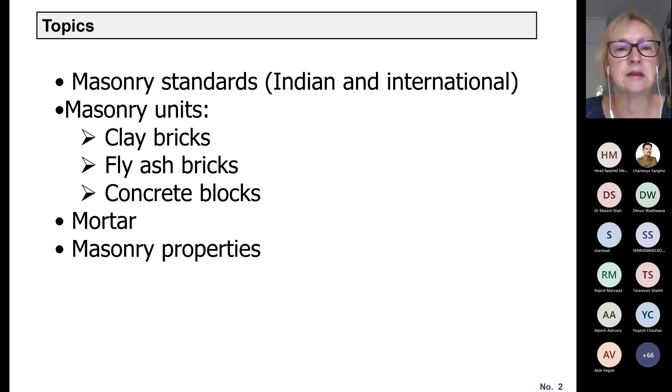Before that, we'll go over Indian standards, masonry standards. Indian masonry standards are several standards which were all issued by BIS, Bureau of Indian Standards. The main standard is IS 1905, which is Code of Practice for Structural Use of Unreinforced Masonry. Until this year, as we discussed yesterday, that was the only masonry standard for masonry design in India.

Then all the rest of the standards listed on this page are related to masonry materials. For example, there is a standard for burnt bricks, IS 1077, and then the standard for fly ash bricks, IS 12894, and so on. There is also a standard for mortar, IS 2250, Code of Practice for Preparation and Use of Masonry Mortar.

So for any details related to masonry materials, you can refer to standards which are available free of charge. In India, we are going to refer to some of them. You don't need, for this course, to read any of these standards, but it's good to know that they exist.

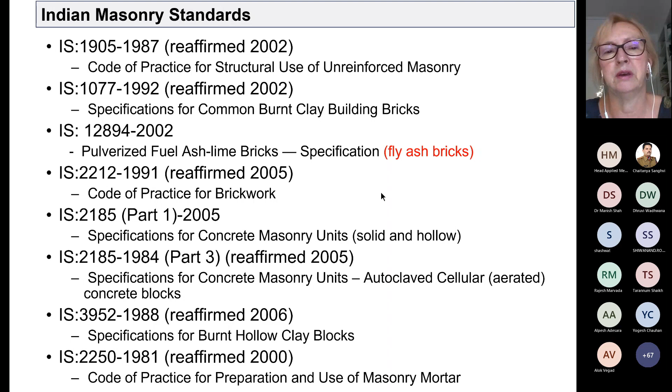So now we will go over masonry units. As we said, a masonry unit is a masonry element. I want you to know this term, unit. So masonry unit could be brick, clay brick, fly ash brick, block.

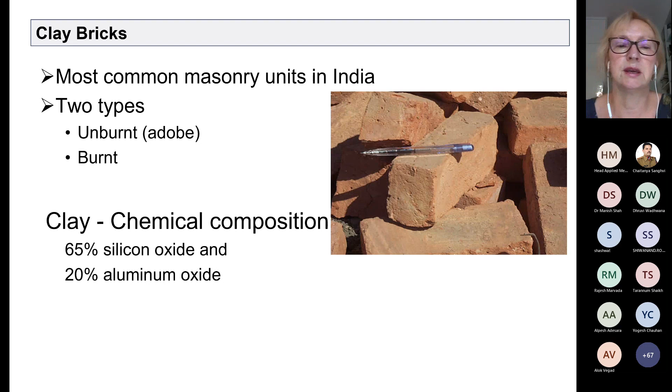Clay bricks are, as the name says, made of clay, and the chemical composition of clay is mostly 65% silicon oxide and 20% aluminum oxide. Typical dimensions in India of bricks are 9-inch length by 4.5-inch width and 3-inch thickness or height. There will be another slide showing this, but it is important in metric, in SI units, this is 230 millimeters by 115 by 76 millimeters, and it is important for you to know the brick dimensions.

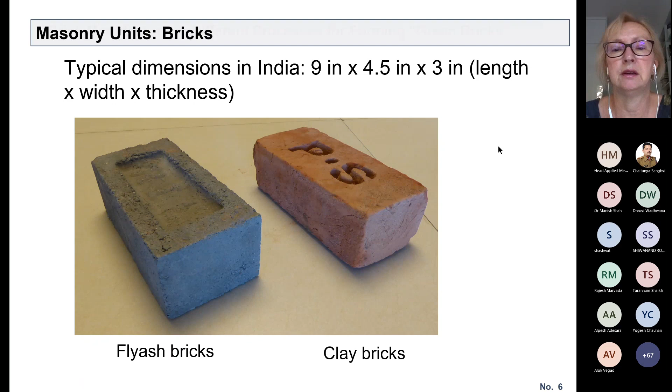So brick manufacturing, the quality or the strength of bricks, compressive strength of bricks, which is the most important property, strongly depends on the manufacturing process, the way they're manufactured. It depends certainly on the source material, which is clay, but it also depends on the quality of that material, and also on the process.

It is the clay which contains 20 to 30% of water by weight, so it's the maximum percentage of water. It is cast in molds, and the mold is turned upside down on a platform. And these bricks usually have a frog on one of the bedding faces.

These bricks are burnt in a continuous kiln known as a bull's trench kiln, the most common type in India. They are the most common bricks, and they are the weakest in terms of strength, the lowest strength.

Next are wire cut bricks, manufactured by the stiff mud process. The clay contains 12 to 15% water by weight, is mixed, forced through a die, and cut with wire. These bricks are significantly stronger, about twice as strong as table molded bricks.

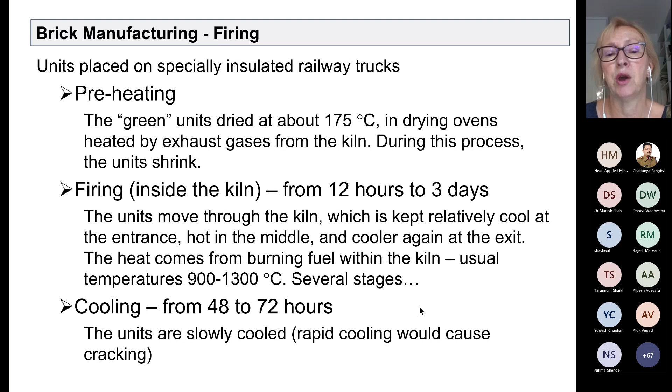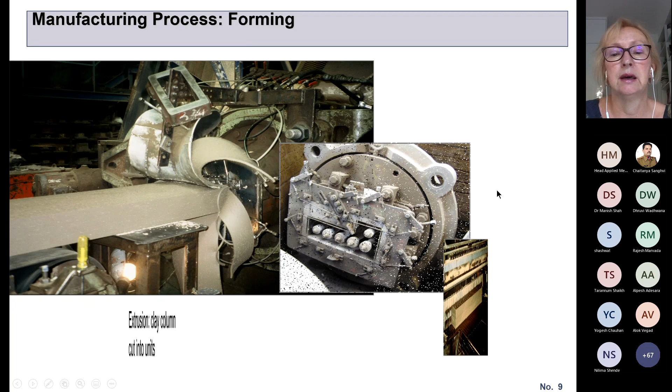These are photographs from a plant. You can see the forming process of the brick, and here is how it is cut with wire - this is a clay column which is cut into units. Finally the bricks are placed on trolleys and moved into the kiln, the furnace, where they're fired at about 1,000 degrees Celsius.

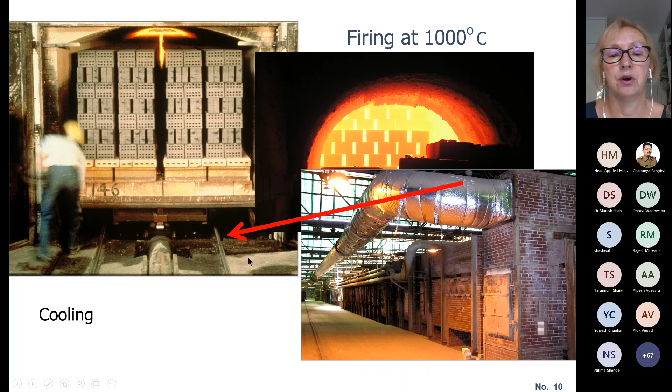Dimensions in India are mostly 229, practically 230 - you can remember 230. The other dimension you can remember is 115, which is half of that, and the third dimension is 75 or 76 millimeters. So this is 9 inches by 4.5 inches by 3 inches.

In Northeast India, dimensions of bricks are slightly larger: the length is 250 millimeters, and the other dimension is half of that, 125. So they are 2 centimeters longer in Northeast India than in, let's say, Gujarat or the rest of India.

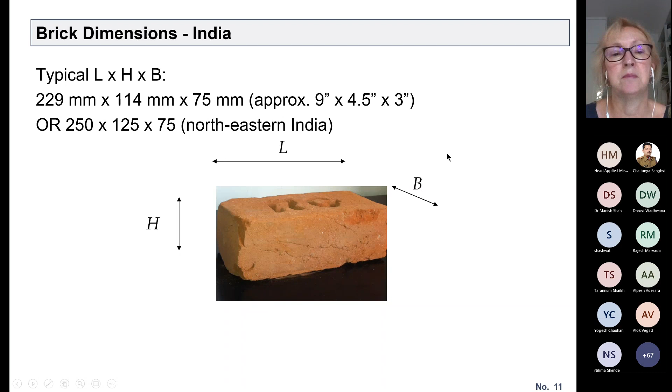As we say, compressive strength of bricks is the most important mechanical property of masonry because, while we don't directly specify it, we specify the grade of bricks, it significantly influences the strength of masonry, as we will discuss. Compressive strength of bricks strongly influences compressive strength of masonry.

Compressive strength of bricks - I will show you some photographs from testing. It is based on normal compression, determined by testing on a universal testing machine, and is equal to the compression stress acting on a horizontal face. In North America, brick strength ranges from 20 to 200 megapascals, whereas in India, the minimum strength prescribed by IS 1905 is only 3.5 megapascals.

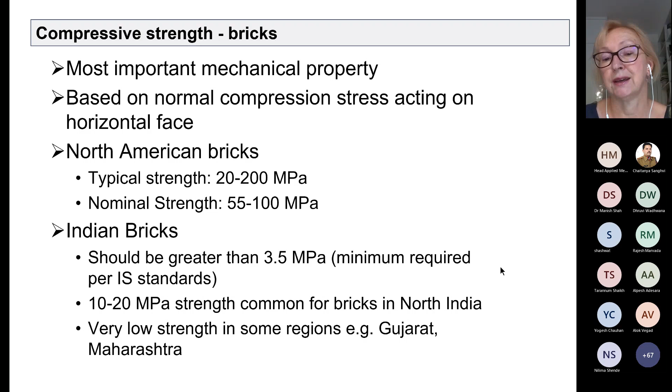So bricks that are 3.5 megapascals strong can be used for construction in India. 10 to 20 megapascal strength is common for bricks in North India, but in Gujarat and Maharashtra, you will often find bricks with only the minimum strength of 3.5 megapascals or even less. Very often, most often, this strength is not even checked - it is specified but not tested, except for larger projects.

This is the testing procedure. You can see this is actually a block, not a brick, but it has a capping, a sulfur capping, to make the top and bottom even. The same procedure applies for bricks, and then it is placed in a testing machine and crushed to determine the compressive strength.

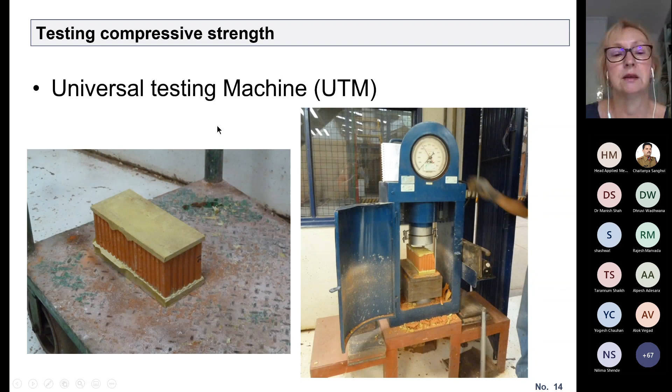The classes of bricks - how do we specify bricks? As I mentioned, there is a standard for bricks, IS 1077, clause 4.1. There is a table showing classes of common burnt clay bricks, with class designations ranging from 3.5 to 35. The class 3.5 is the lowest, related to average compressive strength not less than 3.5 newtons per millimeter square, which is megapascals, or 35 kilograms per centimeter square.

We are going to mostly use megapascals in this discussion. So if you have a brick class of 3.5, that means compressive strength of 3.5 megapascals. This is something you need to know, because in order to design masonry, you need to be able to specify class of bricks and also specify mortar type. In a construction project, you need to, as a designer, specify the class of bricks or blocks. Here I'll illustrate regional strengths of masonry bricks.

This is based on testing reports published in a book by Professor Jagadish, K.S., one of the top masonry experts in India. It's called Structural Masonry, listed at the end of this presentation. Unfortunately it's not available electronically, but it can be purchased in India, and it's a good book, a summary of his very long experience. Professor Jagadish was a professor at IISc Bangalore, and often visited Ahmedabad, collaborating with Nirma University on shake table testing. He is a very well-known and top expert in India currently.

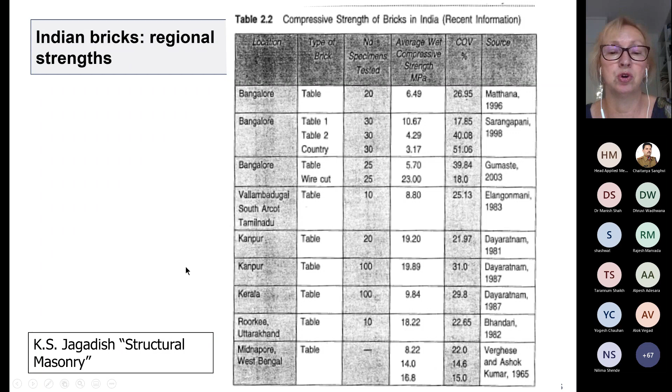And in West Bengal, it changes. But if you go to Maharashtra and also Gujarat, strength of bricks is maybe very low, close to the minimum code value. There are more values in the book by Professor Jagadish, and more reported values in various papers and publications.

In conclusion, from the clay bricks, I would like you to know what is the class of bricks and what is the minimum allowable grade in India. For fly ash bricks, they're specified by the standard listed at the beginning, IS 12894. They have higher crushing strength or compressive strength compared to clay bricks - normally 10 to 15 megapascal strength can be easily achieved - and they have relatively low water absorption. They have reduced efflorescence, although efflorescence is still possible with these fly ash bricks.

They have a smooth and uniform size, require less quantity of mortar, and no plaster - though I think plaster is always beneficial due to rainy season. The density of fly ash bricks is less than clay bricks: about 1600 kilograms per meter cube, while for clay bricks it's about 1900. Lower density means lower weight of load-bearing walls, and saves some transportation costs.

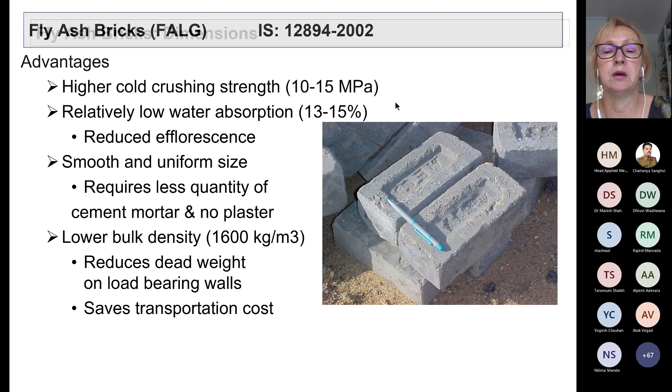So these are some photographs of fly ash bricks along with a pen to show the size, and you can see that they have a frog as well. The frog is this indented portion in the brick, usually produced for better bond properties as discussed yesterday. Here are some dimensions of fly ash bricks.

Fly ash bricks are slightly smaller in dimensions than clay bricks, around 19 or 20 centimeters long, with the other two dimensions being 90 and 90 millimeters. But they are used in the same manner, with the same type of bond or pattern.

Methods of manufacturing for fly ash bricks: the primary ingredient is fly ash, the byproduct of thermal plants. For example, in Ahmedabad there are thermal plants close to the city, in the Gandhinagar area, and this fly ash can be recycled as an ingredient for masonry, making it an environmentally friendly or eco type of masonry unit.

The other ingredients are sand and lime, with small quantities of chemical accelerators added. In the mixing stage, the ingredients are dry mixed with about 8 to 10% water and a small percentage of chemical accelerator, then subjected to thorough mixing.

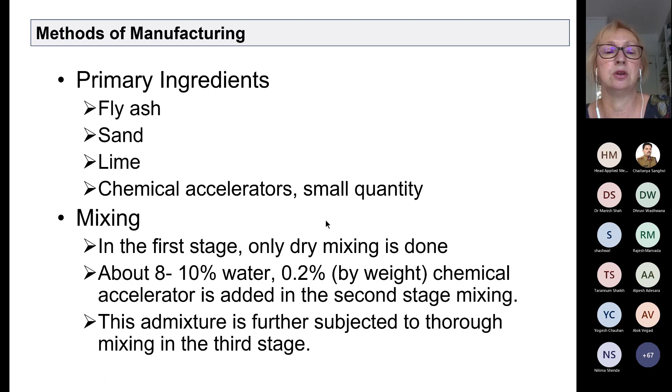In the molding stage, the placed raw material is subjected to pressure. They're manufactured under pressure of about 25 megapascals in a suitable hydraulic press. These are some examples of presses available in India.

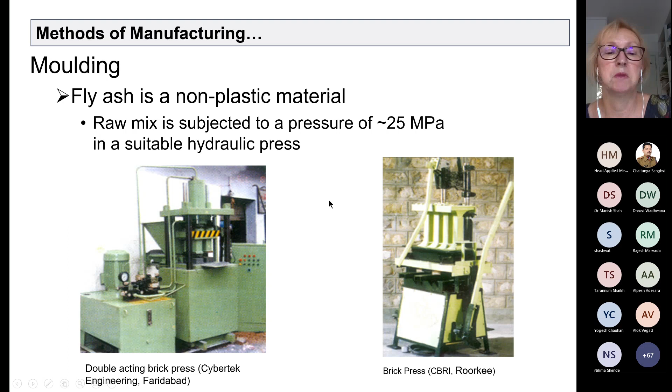Then there is a drying stage where the bricks are exposed to natural drying for about 48 to 60 hours, depending on weather conditions. Finally, there is steam curing, where the bricks are cured in autoclaves at the desired pressure and temperature, then stacked in the open to gain further strength for a small amount of time, like 2 days.

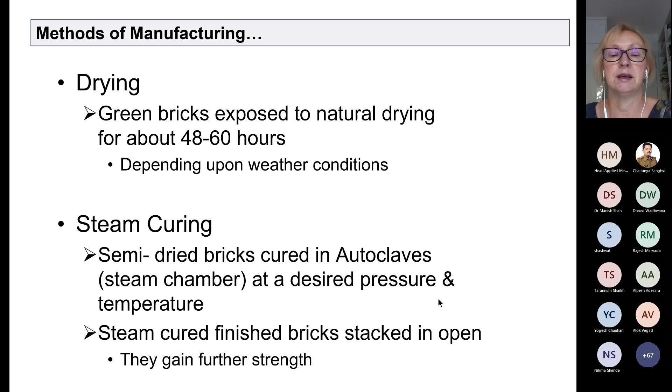When IIT Gandhinagar campus was constructed, there was first an attempt to use clay bricks for the load-bearing masonry, since practically all residential portions of the campus use load-bearing confined masonry. There was a need for a minimum class 7.5 grade of clay bricks. However, it was not possible to get bricks of that class in sufficient amounts, and there was limited time for construction.

Therefore, a decision was made to use fly ash bricks and set up a plant at the campus. These are photographs from the plant - on the left you can see the press, and on the right the bricks coming out of the press. The process was set up, and the plant was able to manufacture more than 1 lakh bricks per day.

Additional fly ash bricks were purchased from other plants as well, since even the campus plant's output was not sufficient for the needs of the campus construction.

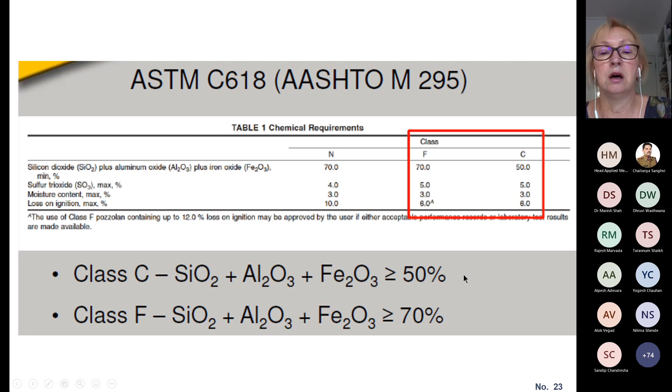These are some chemical requirements - you don't need to memorize them. Here is a summary of fly ash bricks for India, including the class. The density is 1500 to 1600 kilograms per meter cube, whereas for clay bricks it's 1500 to 1900, though I usually take 1920 as the common value in India.

In this table you can see the class designation, which works the same way as for clay bricks - the class designation equals the compressive strength in megapascals. So class 15 means the compressive strength is 15 megapascals, or 15 newtons per millimeter square. That's good news - whether it's fly ash brick or clay brick, you specify the class in the same way, though we call it class, not grade. The full title is Pulverized Fuel Ash Lime Bricks, or FALG.

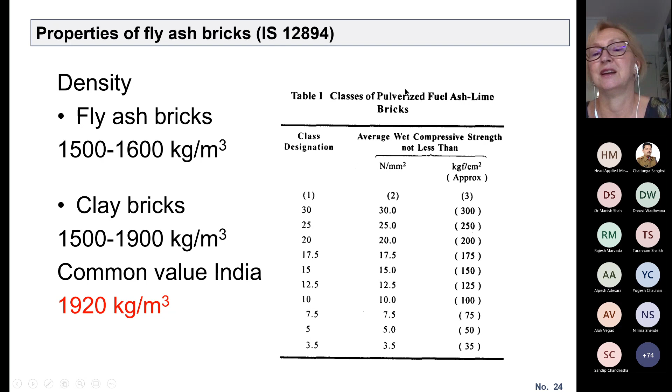So that is the common name, concrete blocks. I'll just mention them, as you know they are available in India, and unfortunately I believe the quality is mostly not good. They could definitely be used for confined masonry construction if the strength is good enough.

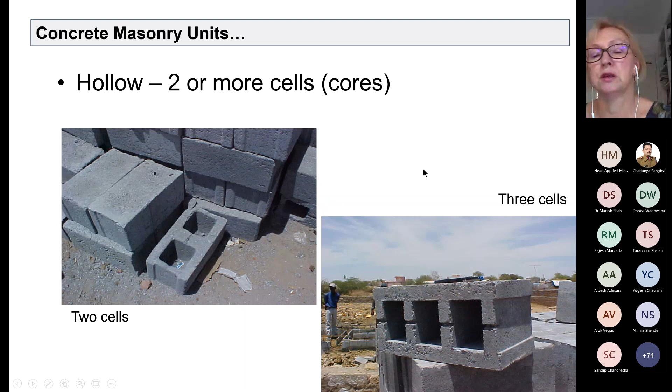In Haiti, I showed you some photographs yesterday, saying that it was very bad block quality. They all had 3 cells, so they were not reinforced, and they were with 3 cells in most cases.

Dimensions of concrete blocks are also standardized, like bricks are standardized, they're more or less fixed. Dimension B, as you can see at the bottom, is the width, H is the height or thickness, and L is the length. We have 2 types of dimensions: nominal and specified. Nominal dimensions for B and H are 200 millimeters or 20 centimeters, and the length is 400 millimeters or 40 centimeters.

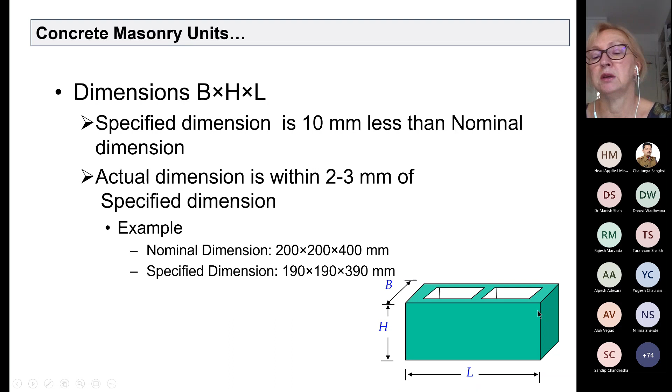Specified dimension is 10 millimeters less than the nominal dimension, that's simply how it is. Normally we always refer to blocks by nominal dimensions, so the standard length is 40 centimeters, height is 20, and width is also 20 centimeters.

Here is also from a Canadian book. These are standard, and we call it by the thickness. This thickness, 190 or 200 millimeters, is variable. In the blocks, the other 2 dimensions, length and height, are always fixed. We only change, or it is possible to change, only the thickness of the blocks.

So there's a variety, this photograph is from Canada, of all types of blocks that are available. You can see a variety of full-size blocks with 2 holes, then a half block, because in masonry construction we need also half blocks, and so on.

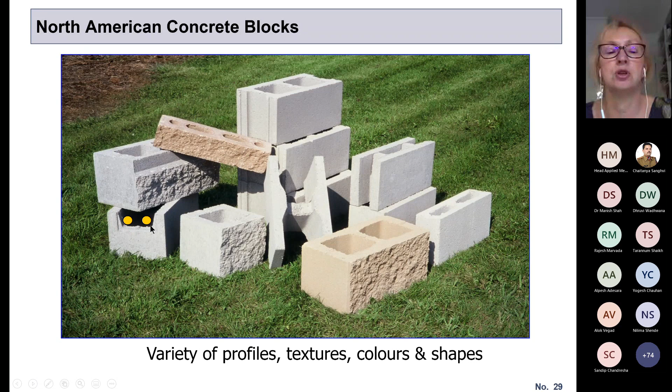And this is, when I talked about reinforced masonry blocks with the indentation or cuts, it's called bond beam blocks. These yellow circles shown at the bottom left corner represent reinforcing bars, so that reinforcing bars can fit. That is a special block provided at certain locations where we want horizontal reinforcement, so not every block is like this.

As I said, the width or thickness nominal starts from 100 millimeters or 10 centimeters. These are mostly for partition walls, and 125 also for partition walls. 150 is the minimum that could be used for load-bearing construction, but usually the typical block is 200 millimeters thick. There are also 2 higher thicknesses, 250 and 300 millimeters. So these are all possible block thicknesses available in Canada. As I said, standard is 200, and most buildings are built using 200 millimeter thick blocks.

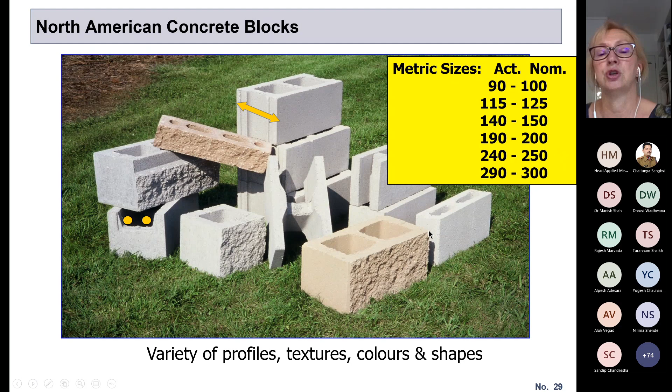What is interesting is that in the manufacturing process, it's possible to create a nice texture outside, so there's no need for extra finishing. You can see on these 2 or 3 blocks this rough texture that is done purposely. These are for exterior walls, and they don't need any finishing on top of it. So there is a pretty developed process.

In block manufacturing plants, this is the so-called dry cast process concrete. You can see here the photograph, these are the blocks before being processed. They are so-called green blocks after cutting and forming, and they stand without falling apart even though they have not been hardened yet.

That means the mix is very dry and the percentage of water is very low. There is no defined percentage of water for block manufacturing according to the standards - the only standard is the required strength. The ingredients for blocks are cement, aggregate, and water, manufactured by vibration, same as concrete. There is very high output - these plants can make at least 10,000 blocks a day or more.

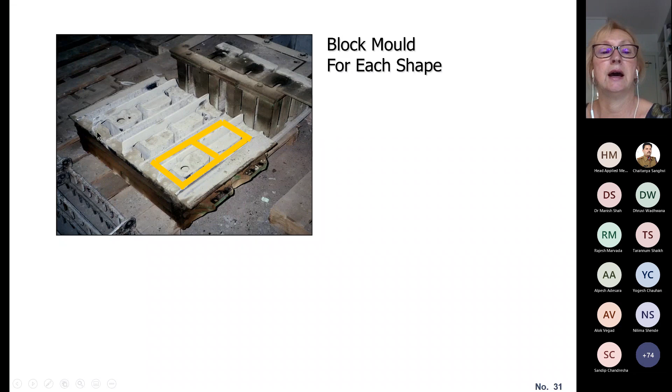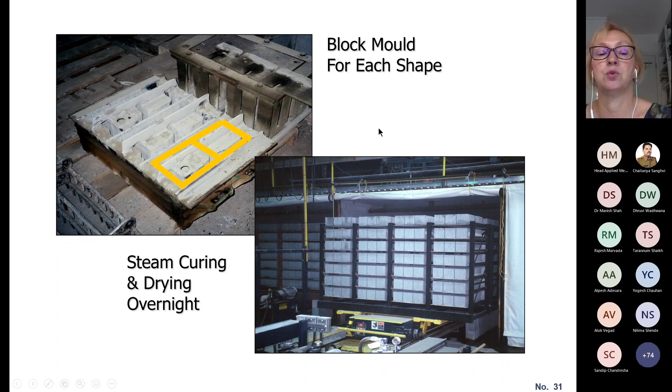For regular concrete construction we need 28 days curing to harden, but here we are talking about 1 day curing before the block is good for construction. There are different molds for each shape - if you have different block thicknesses like 200 millimeters and 300 millimeters, you'd have different molds. After cutting, the blocks are placed in special chambers where they're cured in an accelerated manner by steam curing, dried overnight. They're not burned, just steam cured, which leads to very fast hardening, and they achieve full compressive strength within 2 days maximum.

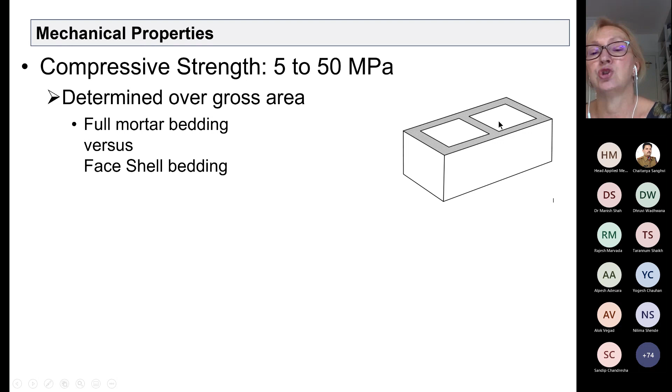Mechanical properties of blocks: compressive strength is 5 to 50 megapascals. It could be determined over gross or net area, so that needs to be specified by the standard. You need to be careful how it is determined if you're involved in testing - for design purposes it doesn't matter, you can use the strength value from the testing lab. But for testing, the standard specifies this because in some countries the strength is determined based on gross area, meaning we take outer dimensions - width times length - whereas net area would be the gray shaded area, meaning we don't take into account the holes.

In India, the standard where you can look for the specification of blocks is IS 2185 part 1, which gives physical requirements for blocks. We have different types: for load-bearing units, it is grade A block and grade B block. You can see the A or B, and in the brackets the number, which is the compressive strength. Typical compressive strengths for A blocks are 3.5, 4.5, up to 7 megapascals. For B, it is smaller - 2, 3, or 5.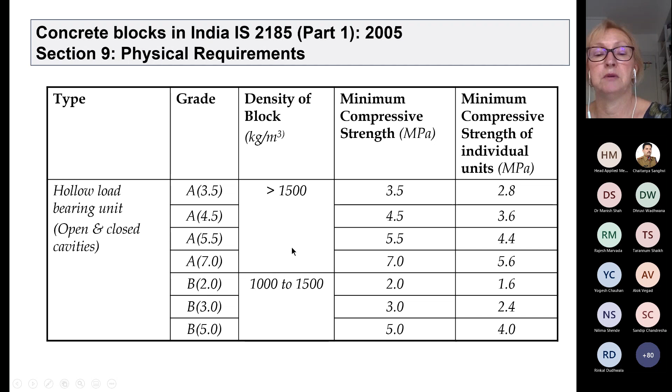You can specify different strengths if you order from the plant, but these are listed in the standards as typical strength, with maximum strength being 7 megapascals. The density of a block is also less than concrete - just greater than 1500 kilograms per meter cube, versus concrete density close to 2500 kilograms per meter cube. For B type it is even less. Then we have C type, a non-load bearing unit with lower strength of 1.5 megapascals. And D is a solid load-bearing unit - A, B, and C are hollow, D is solid, with strength of 5 or 4 megapascals.

Indian compressive strength values are significantly lower than other countries, where the usual minimum value is 10 megapascals. But in India, lower values are acceptable right now, I guess because blocks were used for low-rise buildings or non-load-bearing structures, where strength is not as important. But for load-bearing masonry, as we will discuss, the strength is really important and has to be higher. So these were the masonry units we covered: bricks, blocks, clay bricks, fly ash bricks, and blocks.

Now we are moving on to the mortar. Mortar is like a glue, it bonds the masonry units together into an integral structural assembly, which we call masonry. So we call it a masonry wall if we have bricks or blocks, and mortar at the minimum.

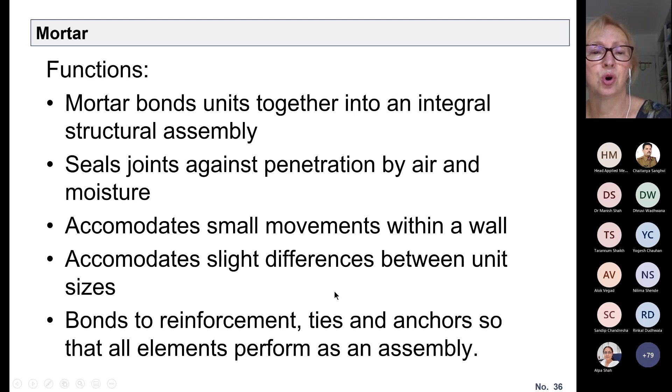Mortar, as I said, is very important to seal the masonry and to prevent water penetration. The mortar joints can be tooled differently if we want a special appearance for the exterior. I'm not going to go into that.

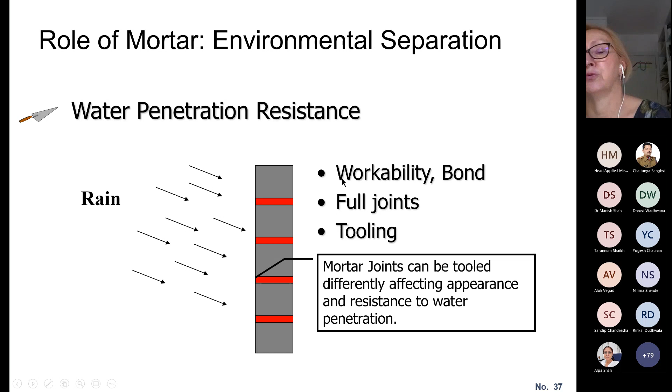For mortar, it is very important to be workable. Masons know what workable mortar means, that it can be easily applied. That's why there is no exact percentage of water, or water-cement ratio, like in concrete. The mason, by experience, uses the amount of water needed for this workability.

Mortar in masonry walls is subjected to tension, compression, and shear stresses, which is actually testing the bond between masonry and mortar. So the mortar needs to be subjected to horizontal stresses in order to test the bond.

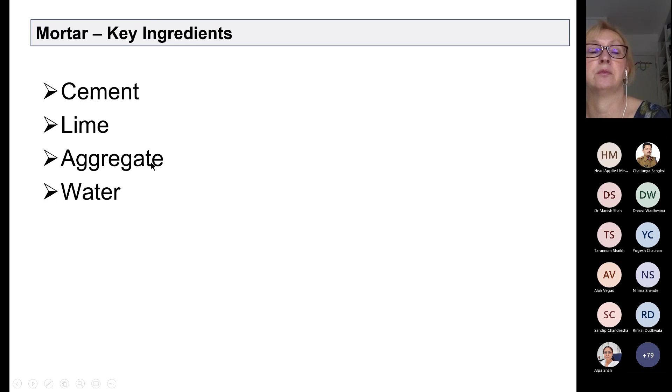Key ingredients of mortar are cement, lime, aggregate, and water. Aggregate is more or less sand, but lime is optional, though very good. So nowadays the mandatory ingredients are cement, aggregate meaning sand, and water. Lime is an optional ingredient.

I will talk about two types of mortar classifications. One is by the ASTM standard, which is used internationally, and I'd like you to be aware of this classification, which is actually much simpler than the classification in India. Then we will go over the classification of mortars in India according to IS 1905.

According to the ASTM C270 standard, used in the US and Canada for sure, maybe in some other countries, the mortar types come from the words mason work. You can see the capital letters M, S, N, O, and K. Type M mortar is the strongest, type K is the weakest. So the types of mortars are M, S, N, O, and K.

There are several types, but mostly for construction of structural masonry, which would be load-bearing, or used for reinforced or confined masonry, type S mortar is used, which is convenient. S stands for structural, whereas type N mortar would be used for non-structural work. For example, if you are building a masonry infill in a concrete frame, you would use type N mortar, not type S, in Canada or the US.

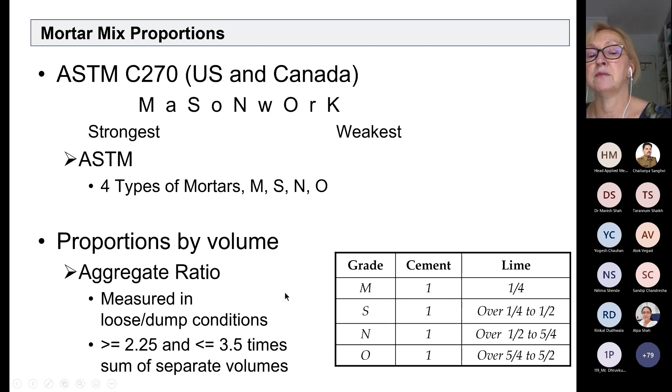So we order type S mortar, it already comes in a bag, just like cement is sold in India. This is a table listing the specification for these 4 types of mortar. I'll focus only on type S. As I said, 1 cement, 1/4 to 1/2 lime, and then aggregate sand practically, let's put 3. So 1, let's say 1.5 over 3 would be the ratio of this mortar.

Air content we did not talk about, we don't have time to discuss this property, but it's also important. Average compressive strength, maybe you remember, is on the order of 12 megapascals, which is higher than the strength of brick in India. So this would be a high strength mortar for a brick, which is, let's say, 3.5 megapascals.

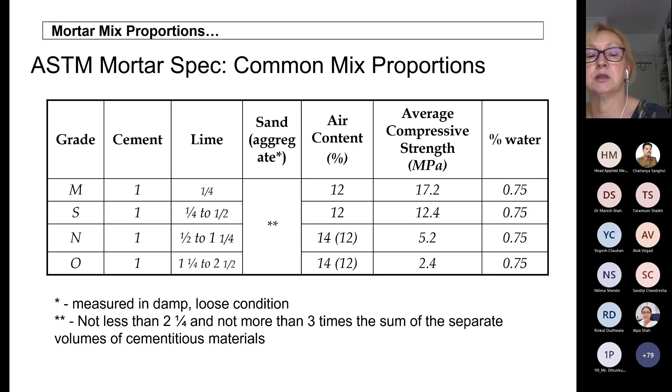The most common mortar in India is M1 mortar, which is 1 cement to 6 sand. That mortar has a strength of only 3 megapascals. That's okay if the strength of bricks is also low, but if you require higher strength bricks, then type H mortar would need to be used. So in summary, types H, M, and L are all specified by IS 1905, and for confined masonry the same labels remain. We are taking all material properties from IS 1905, so you need access to that standard to understand or have a list of these mortar types.

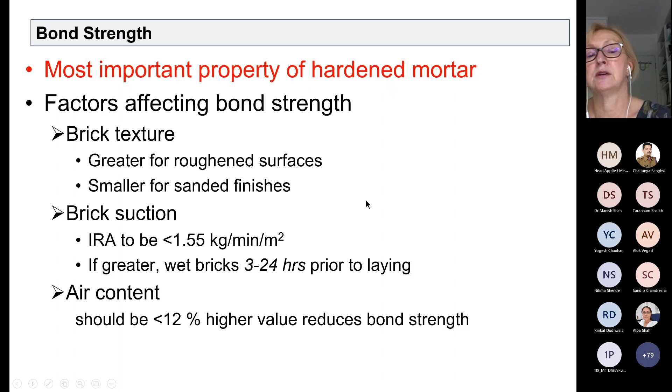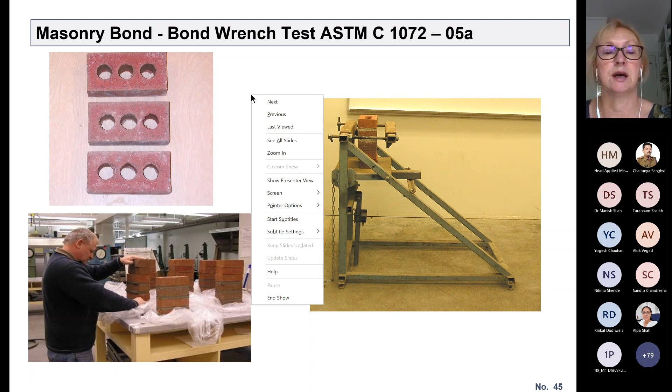It is according to this standard, but you need to have this testing frame, which needs to be manufactured in the lab or site. Sorry, I removed those other slides showing results because of limited time.

Bond is an important property, but we never specify bond. What we specify, the only property of mortar that is specified for construction and design, is compressive strength. In fact, we specify the type of mortar, which comes with the compressive strength. So if you say H1 mortar, we expect that it has a strength of at least 10 megapascals, as discussed.

The test is done based on mortar specimens which are 50 millimeter cubes, similar to testing of concrete cubes, but these cubes are smaller, and they're tested in a universal testing machine after 28 days. Mortar cubes are cured in the same way as concrete cubes, and mortar strength in the wall may be higher than those tests because of the interaction of bricks and mortar. What happens is when mortar is fresh and the bricks have higher absorption, they absorb water from the mortar, which actually causes the mortar strength to increase, but bond may decrease in reality.

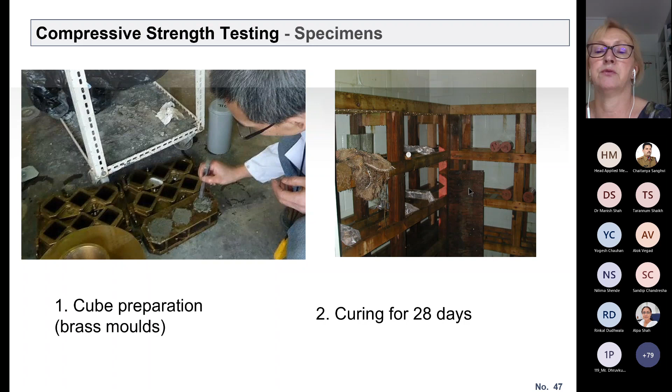This is the placing, according again to ASTM standards - there are specific molds for mortar cubes, and after they're prepared in a specific way by tamping, they're cured for 28 days in a curing room, and tested in a testing machine, at the end exactly the same way as concrete cubes - there is no difference.

Now what is really important is this magic 1:6 cement sand mortar, which is used in India, or at least when I was a student at University of Roorkee, that was the mortar I used for construction of my model. Until now, I think this was the most common mortar type.

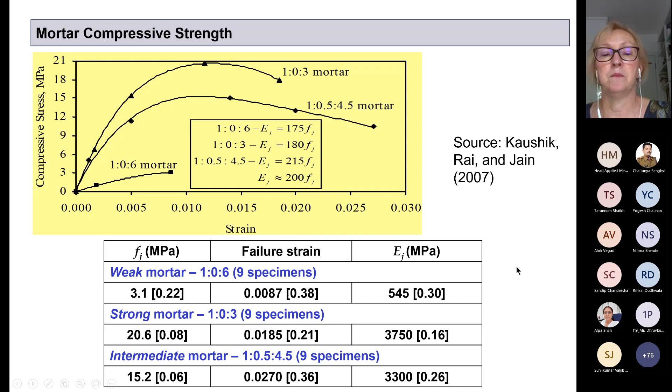So that is important. That is all I wanted to say about mortar. As I said, there are some other properties, maybe more details about bond, about air content and all that, but we are not going to talk about that. We are focusing only on the properties relevant for our design in the course, but there could be more. Normally my lectures on masonry materials are longer than this.

So for mortar, I would like you to know what are the types of mortar in India and what are the types according to ASTM, and which types are used for load-bearing masonry. And today, at the end of this lecture, you will see what is required by the Indian standard for confined masonry. Not all mortars are allowed for that, and not all brick or masonry unit properties are allowed.

Now, the final topic in terms of description is mechanical properties of masonry, and our main focus is compressive strength, which is called F'm. This F'm is equivalent to Fck for concrete. This is the property that will be used for design. We always need to know somehow, or assume, what is the F'm for the masonry in order to design a confined masonry structure, a wall, for example, which we will do. So this is the most important mechanical property of masonry, since it is most intimately related to resistance under load, serviceability, and durability.

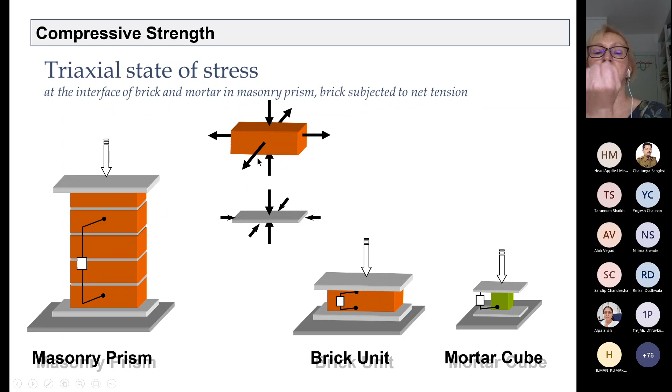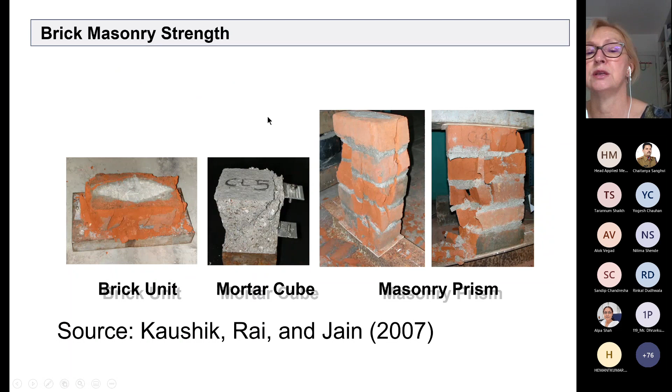This value of F prime M can be evaluated by compression tests on masonry prisms, and design of masonry elements can be based on the specified compressive strength of masonry, whose role is analogous to that of specified characteristic strength of concrete. So we need to get this strength either by testing or by specifying the strength, the class of brick and mortar type according to IS 1905 standard. I will show you how to do that at the end of this lecture.

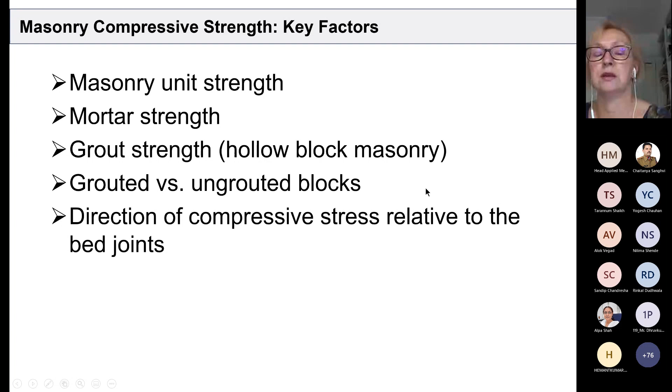What are the key factors that influence masonry compressive strength? Masonry unit strength is number one, and it influences to the maximum extent. Mortar strength is second. In case of block masonry, grout strength, grouted versus ungrouted, and direction of compressive stress relative to the bed joints are also critical. So these three factors are critical for brick masonry: unit strength, mortar strength, and direction of compressive stress relative to the bed joints. I will show you what that is later, but these first two we will discuss now.

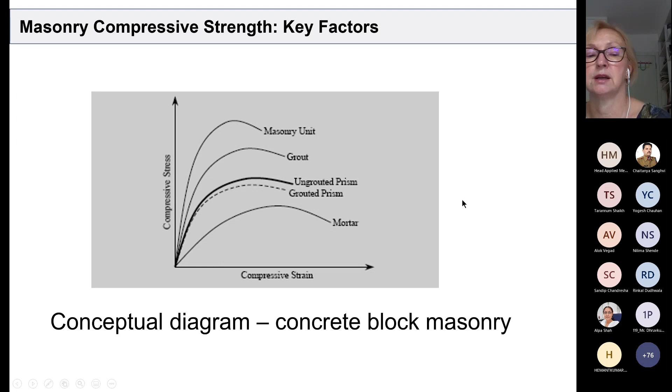If compressive strength of masonry units is higher, we have stronger bricks. We are in northern India and we have 20 MPa bricks. F prime M is going to be higher than F prime M in Gujarat, where we have lower strength bricks, and we use the same type of mortar.

As far as mortar is concerned, lower strength mortar will result in low prism strength, but there is, I would say, a myth that mortar strength is important and the percentage of cement is more important than bricks. That is not true. Actually, it's more important to have higher strength bricks.

Thickness of mortar with respect to thickness of unit is important in India. You could see that in some cases mortar joints are thicker. Normally it should be 10 to 12 millimeters, but in practice you can see 20 millimeters or more. There is no benefit of it. It is a waste of mortar and it can result in lower masonry strength. There are some tests to that effect, but I'm not showing the results.

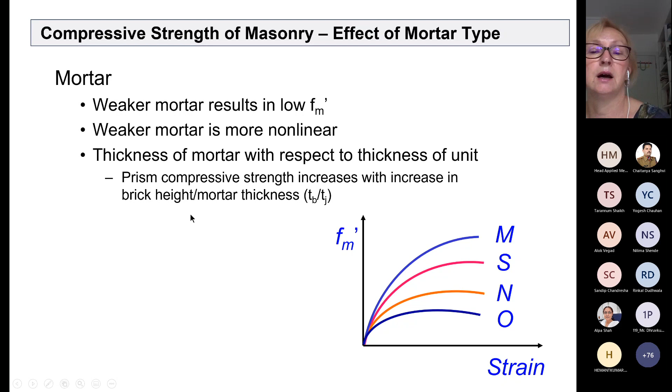Mortar type, as I said, these are now shown with the ASTM types. The higher strength of mortar influences the strength of masonry, as I said. That is there. But the question is how to determine compressive strength.

We are coming now to the way that we are going to determine this for the course. One way, and that is how it is specified by Indian standards as well, is to do a prism test where at least 2 to 5 units are stacked together and tested. The other is a knowledge of the unit and mortar strengths or assumption, and based on that we determine F prime M. The third is an in-field test: if you already have a constructed wall, you would need to take samples from the wall. But for new construction, we have options 1 or 2.

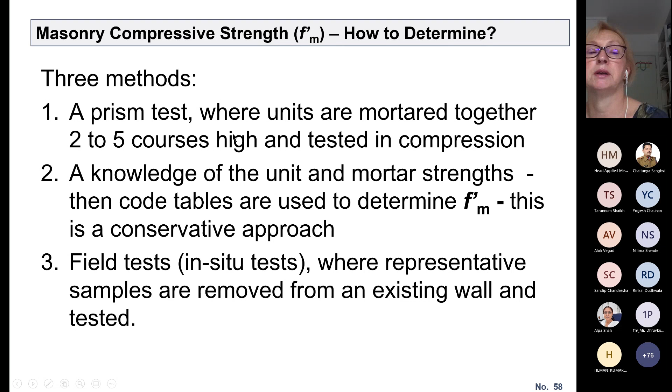Either do a prism test at the site for larger projects—for example, at IIT Gandhinagar project, these prism tests were done—or have knowledge of this. The strength of brick masonry is determined based on the net horizontal area of the bricks, and there are some correction factors depending on the height to thickness ratio of the prism, which could reduce or increase the strength depending on the ratio. That is all specified in IS 1905.

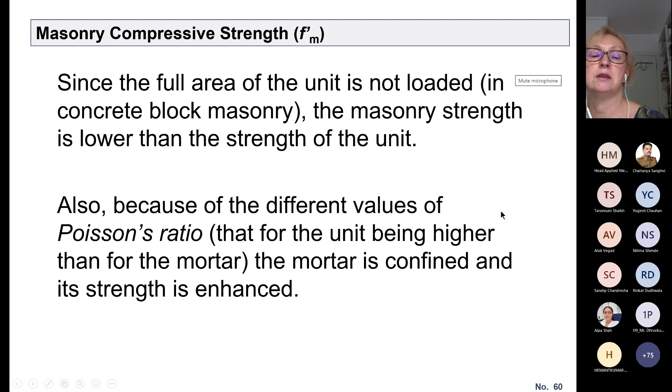Since the full area of the unit is not loaded—that is only for concrete—the strength of masonry is lower than the strength of unit because there are different values of Poisson's ratio: Poisson's ratio for the unit is higher than for the mortar. So the mortar is confined and its strength is enhanced, but those differences in Poisson's ratio make a difference in the strength of masonry versus strength of masonry unit.

Here are some results from the work by Kaushik, Rai, and Jain. You can see they tested four brick strengths: one type was 16 megapascals, B bricks and M bricks were maybe 18, S bricks about 20, and O-type bricks were more than close to 30 MPa. These O-type bricks are very high for India. You can see here the influence of prism strength depending on the mortar type.

So you can see this 1/6 type mortar, and you can see how it changed depending on the brick strength. If brick strength changed from 15 to 30, there was a change in the prism strength, but it is not twice. If you have a higher strength mortar, the change in the strength of prism is very small. For the same mortar type, it was a smaller difference in the prism strength. So for this 1/3 mortar, and 1/0.5 and 4.5 type of mortar, it's very flat, not a very steep curve, depending on the brick strength.

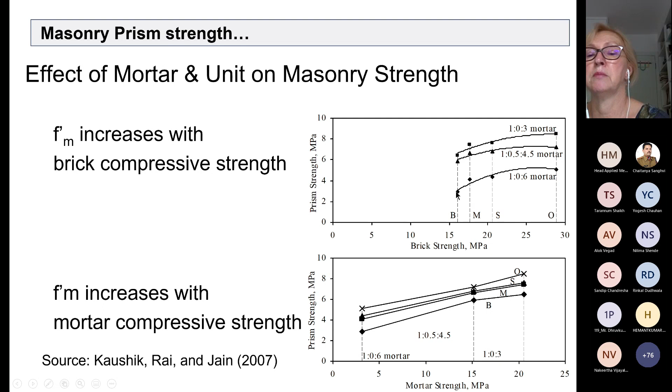This is another way of showing it. This is the variation in mortar strength on the horizontal axis at the bottom, depending on the brick type. You can see that for 1/6 mortar, which is the lowest, you see the largest variation in the prism strength. That is actually the same information from the upper diagram, so the conclusion is the same. In any case, F'M increases with brick compressive strength, and F'M increases with mortar compressive strength. So both are important, but I would say bricks are more important, particularly for lower strength mortar, as you can see on the upper diagram. For 1/6 mortar, it changes maximum depending on the brick strength, much larger extent than for the other values.

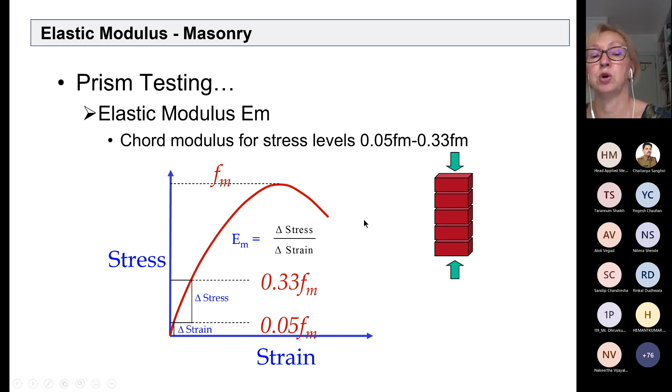In terms of elastic properties, the next property besides compressive strength is the elastic modulus of masonry, and it has to be obtained by prism testing, or there is a formula. Elastic modulus based on prism testing is obtained by the stress strain diagram - it is a slope, as you know from Hooke's law, in the range of 5% to 33% of F prime M. This is a stress strain diagram of masonry. F prime M is the maximum strength. I would also like you to know the shape of the diagram - it is parabolic, and the maximum value is F prime M. The slope of the stress strain diagram in the low stress range, from 5 to 33 percent of F prime M, gives us EM, the modulus of elasticity of masonry. That is an important parameter for design, because in any numerical model you need to have the modulus of elasticity.

So the tests done by the same group, Rai and Kaushik, Rai and Jain, showed that for Indian bricks, the average value was about 300 times the brick compressive strength - this is for clay bricks - for the brick mortar modulus of elasticity, which we are not interested in. For mortar, it is 200 times the mortar compressive strength. But for the prism, please look at the red text, that is what we are interested in - it is about 550 times F prime M. So if you have F prime M of, let's say, 10, then the EM would be 5,500. This is all in megapascals. Please note that - these are three values, strengths for masonry prism specimens. You can see at the bottom, E is 550 F prime M.

You can see a large scatter of results, but anyway, this is the best and this is the accepted value by most masonry standards. In the current Indian standard, or the past Indian standard IS 1905, this value is not included, but it is included in the new standard for confined masonry, because you need to have it.

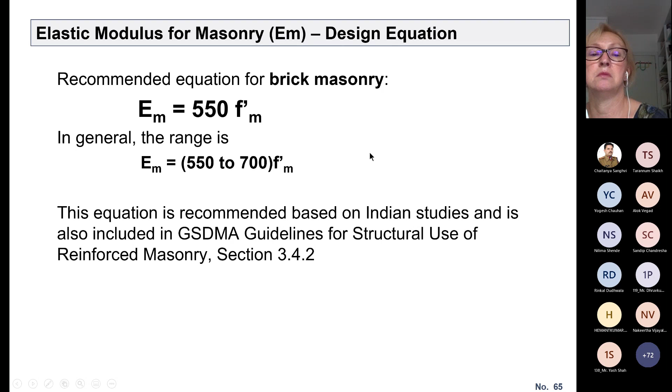Recommended values for brick masonry are definitely 550, as obtained by this testing, but the range in general is between 550 and 700. I think all you need to remember or use is 550 for the test.

Elastic modulus by prism test - these are different types, but I think there is no need to go there.

The last test we are going to show is the diagonal compression test for masonry, which determines the shear strength of masonry. We talked yesterday a little bit about shear strength of masonry, and we will talk a lot about it because we will be using it today in the second lecture. So we need to know what is the basic shear strength of masonry and how we determine it.

One way is, as I said, by equation, as some fraction or relationship with the compression strength, F prime M. But the other way is to do the testing. So how does the test look like?

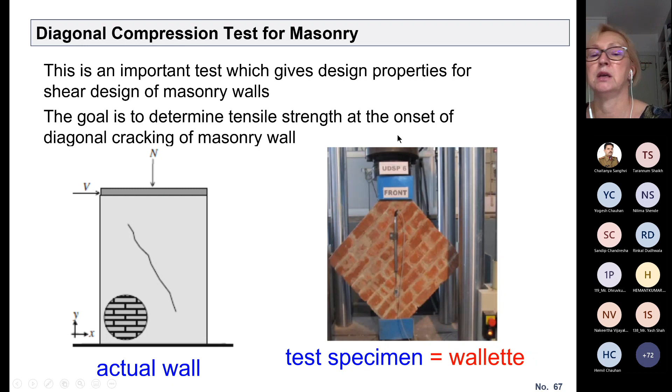Therefore, the standards - there is an ASTM standard for that - specify the size of this specimen, and it is tested in a universal testing machine by applying compression. The value of the shear strength is obtained when the first crack develops along this specimen, a vertical crack in this case, because the specimen is rotated. This is the so-called diagonal compression strength, which is basically the basic masonry shear strength. These are the specimen sizes, per ASTM standard E519, which requires that.

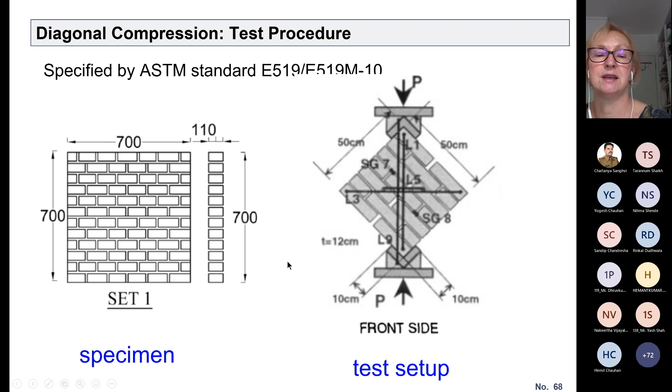I recall that when I visited Nirma University last time, they had this setup for the testing, which is great. These are some tests done at IIT Roorkee by Sachin Kadam, as part of his PhD thesis.

If you recall, we were talking about what is F prime M for Indian conditions, let's say for IIT Gandhinagar. I think I hear some noise - maybe please mute yourself if you're not speaking. No, I mean, I will take questions - I'm almost done with the presentation.

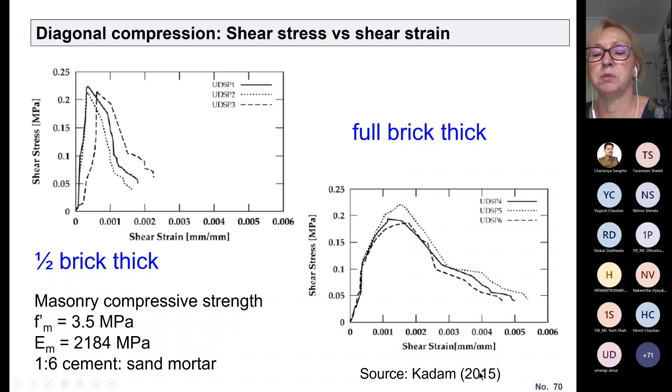In this case we got 0.2 to 0.3 megapascals, and the compressive strength of masonry in this case was 3.5 megapascals. So you can see roughly that the shear strength is less than 10% of the compressive strength. We will use shear strength for determining shear resistance of masonry walls. These specimens, just for your information, are made from M1 mortar, which is 1:6 cement-sand mortar. This is from the PhD thesis of Kadam, 2015.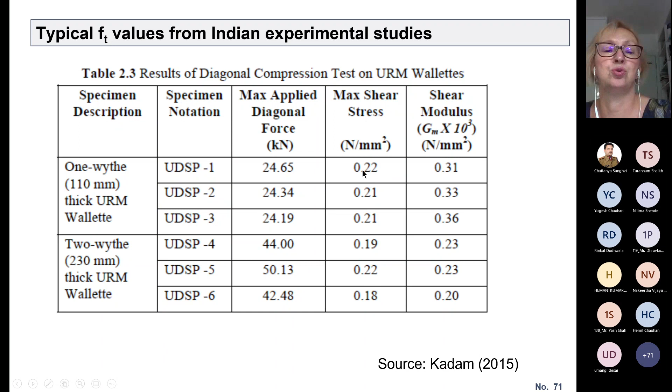These are some values of the maximum shear stress - you can see it is around 0.2, that is from his testing. In the EERI confined masonry guide, which I mentioned yesterday and suggested you download - we can also share it if you haven't downloaded it - there are recommended values based on Mexican experience, and the suggested value for the lower strength mortar, which I would expect in India, is around 0.3.

So the value to remember for the bricks is on the order of 0.3 maximum, for solid clay bricks, while the other are hollow units and the solid blocks. So I would say 0.3, between 0.2 and 0.3, not more than that, will be obtained for Indian masonry strengths. This is important. This masonry shear strength is labeled as VM, and that is how it is mentioned in the code as well, with small letters because it is in stress units of megapascals.

Now I will talk about design methods that are used in the code, and then I will show you those tables. I include them at the end, but that is how it is. So two types of methods are used. In fact, maybe I can skip through that and go to the tables, so I'll skip these two slides and come back to them later.

Actually, I'll go back because I have a reason for going back. As you know, for any material, this is important for the further discussion. We have two types of design approaches or design methods: one is allowable stress design, ASD, also known as working stress design method, and the other is limit state design method, or ultimate limit state design. As you know, IS 1905 is all based on the allowable stress design method.

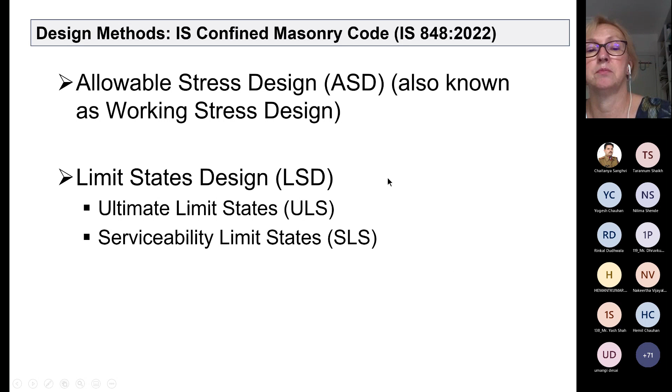This is just to mention, you also have in the code these load combinations, which are not unique; they're the same as, let's say, for concrete. In the limit state design method, the way to design is to increase the loads by load factors. For example, in earthquake load combinations we have, at the bottom 4A, 4B, and 5: 1.5 dead load and 1.5 earthquake load, or 0.9 dead load and 1.5 earthquake load, or 1.2 times dead load and live load and earthquake load. These are the combinations for limit state design.

So we increase the loads, and then in calculating the resistances of the structural elements we apply some reduction factors for materials, because we want to be realistic. These are load factors, and I'm not going to repeat this again because, as I said, these are the same as you would use for concrete structures. They're also listed, I believe, at the beginning of the masonry section in the confined masonry code.

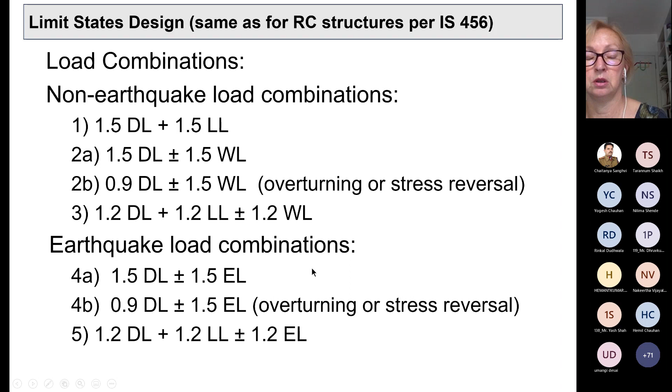Now, why is this the basis? When it comes to material properties, you know that for the limit state design method you have a partial safety factor for concrete, for steel, and for masonry. For masonry, this factor is 2 — gamma M for masonry is 2. If it was concrete, it's 1.5; for steel, 1.15. So the inverse of material resistance factor, which is used in American and Canadian codes, for example, is 1 over gamma. So you basically divide by this value of 2, which is the same as if you were to multiply the strength, let's say compressive strength, by 0.5.

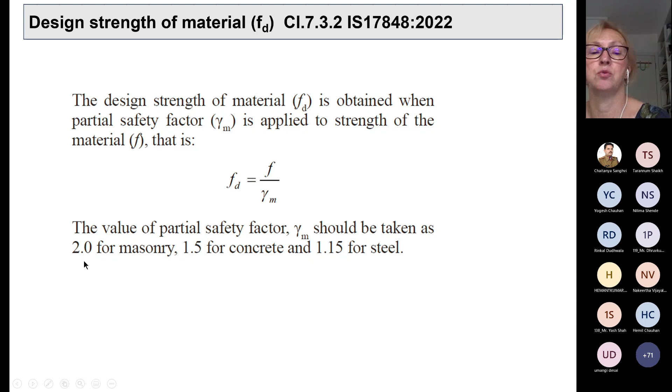And this is now new in the code — this is now from the confined masonry code. This is stated just to remind engineers that if we talk about design strength, we take the ultimate strength and divide by gamma M. If gamma M is 2, then it is the same: you divide by 2, which is the same as multiplying the strength by 0.5. So it says directly that this value is 2 for masonry, 1.5 for concrete, and 1.15 for steel.

Now, in IS 1905, as we said, there is a way to determine allowable stress or ultimate stress based on the knowledge of the class of masonry and the mortar grade, mortar type. So if we have, let's say, this is Table 10 from IS 1905, which gives the basic compressive strength for brick masonry.

So this first row gives us all these classes of bricks: 3.5, 5, 7.5, 10, and it goes all the way to 40. In the vertical column you have the type of mortar: H1, H2, M1, M2. I created this table extracted from IS 1905.

For example, if you have 10 MPa brick strength, let's say we have relatively good bricks for local conditions in Gujarat, they are really good if you have 10. Then if you use H1 mortar, allowable brick basic compressive strength is 1. But that is not what the question is, what is F prime M?

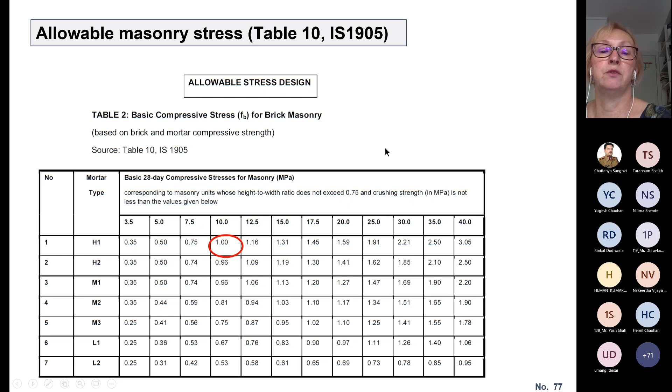So then we go to the next table, which gives us F prime M. How do we get F prime M? By multiplying the basic compressive strength by 4. Why 4? Because we said the factor of safety is 4. So we are going the inverse method of calculating it, instead of dividing F prime M by 4, to get allowable stress we are multiplying by 4. So the value of 10, if you have 10 MPa bricks and H1 mortar, is now 4. So F prime M is 4 if you have 10 MPa bricks and H1 mortar. That is how it is going to be used.

So this table is very useful, or you can just use the basic table from IS 1905 and multiply by 4. It's up to you. This table is in one of your slides, and you can use it for design, according to the code. So this is the equation: F prime M is 4 times FB.

Now we are coming to a few requirements. Yesterday, one of you asked a very good question: how is the masonry code or confined masonry code in India different from confined masonry codes in other countries? One of the differences is what compressive strength is allowed.

In section 5.1.3 of the code, it says that the minimum compressive strength of masonry units used for confined masonry buildings up to 2 stories shall be 3.5 megapascals, and for more than two stories it shall be 7 megapascals. For concrete blocks, minimum compressive strength shall be 7 megapascals. So the standard allows up to 2-story height to use the minimum strength bricks, but if you want to go more than 2 stories, it is necessary to use 7 MPa bricks. Yes, for blocks it is 7 MPa.

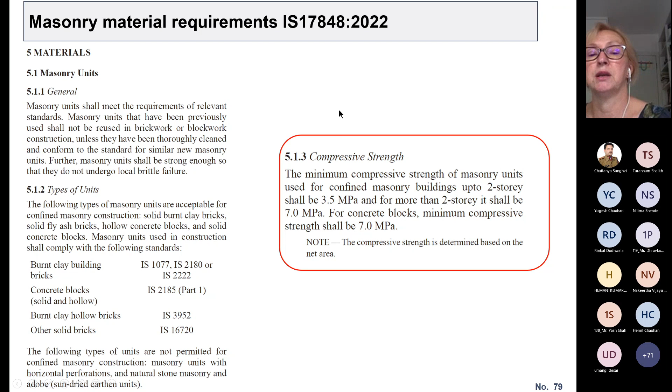Next topic covered by the standard is mortar. You can see here that it says only 4 types of mortar out of all that are available according to IS 1905 are permitted: M1, M2, H1, and H2. It talks about mud mortar and all that, but only these 4 types of mortar are permitted.

Then next is F prime M, specified compressive strength of masonry. In the definitions, section 3.10 of the code, it says what is specified compressive strength of masonry, and I would like you to know this definition: compressive strength of masonry expressed as force per unit of net cross-sectional area, required of the masonry used in construction by the contract documents, and upon which the project design is based. Whenever the quantity is under the radical sign, the square root of the numerical value is intended and has units of MPa. You will use that.

So specified compressive strength should be determined by testing of prism specimens, and in the absence of test values, values for the specified compressive strength should be obtained by multiplying permissible compressive stress according to IS 1905, for the combination of masonry unit strength and mortar type, by the factor of 4.

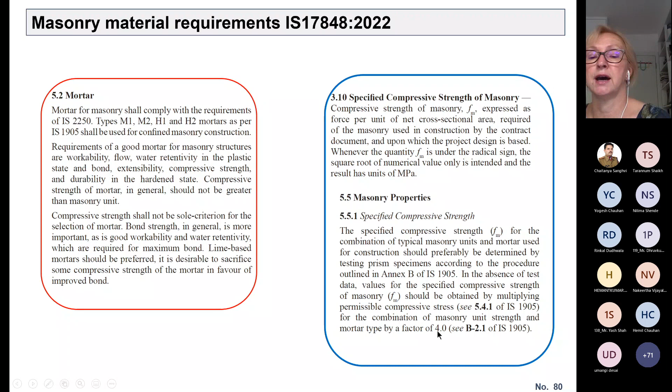You see, that is what I've shown you on the table before. So, finally, elastic modulus, or modulus of elasticity.

The standard says for clay masonry it is 550 fm, and for concrete masonry it is 850 fm. Shear modulus for concrete is 0.4 times modulus of elasticity. For masonry, tests have shown, because of different Poisson's ratio, that it is 0.2. This is important to note because you will also need shear modulus for some calculations in numerical models. It's different than for concrete, so please note this because it's important for further analysis and design.

In this standard, we also have the shear strength of masonry, which is defined in the definition section. It says it is shear force resisted per unit cross-sectional area of masonry, determined by a diagonal compression test of masonry, or as a function of compressive strength of masonry. Annex B in the standard describes this test. It actually encourages this test to be done. Obviously, it's not always going to be possible, and it explains how it is done.

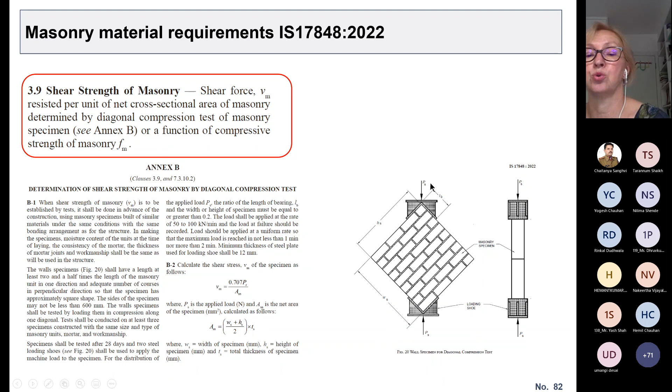It is mostly taken from the ASTM standard, but it shows the specimen type. So all that I've shown you before is shown there.

So that would be all. Any questions from your side?

These are bricks, and now I'll show the manufacturing process.

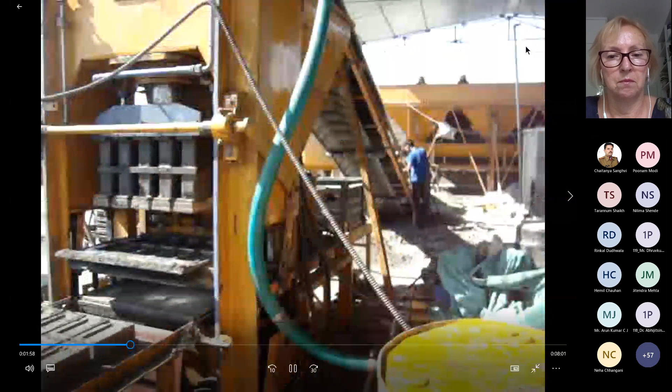So anyway, that is what I wanted to share. I will now stop sharing. That was it, it's a bit longer video, and I was not able to edit it. In case Professor Poonam is interested, we can share it and you can crop it if you want to show it to the students.

That plant has been dismantled after the first phase of construction was done, so it does not exist anymore. But I'm sure there are other manufacturing plants in Gujarat, I know there are, so you can visit one. Any other questions?